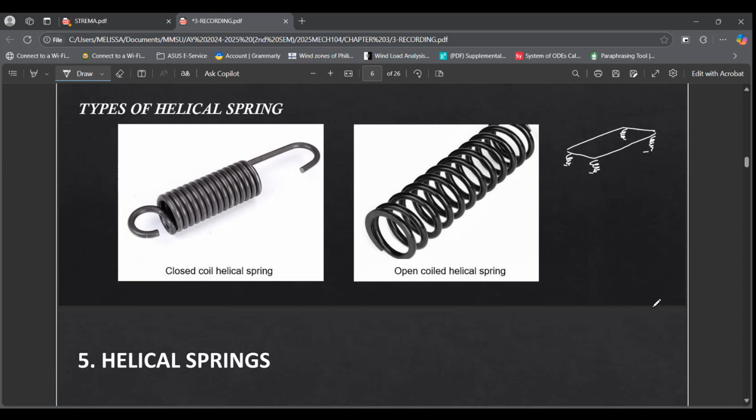What other type of spring undergoes compression? Buildings or structures. We have an example here - a simple steel structure with a machine on top. What does it carry? A load. So the helical springs here are designed to be compressed.

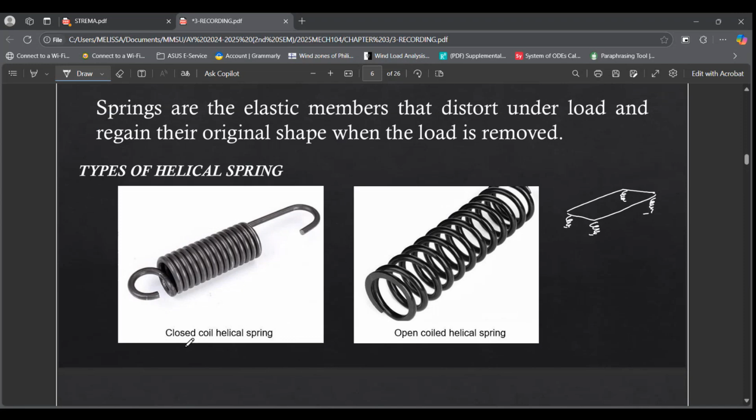And our open coil helical spring is good for tension. If the closed coil carries compression, the open coil carries tension. An example of springs that carry tensile loads are the springs used in doors. Our doors have automatic open and close mechanisms. When we open it, it's intended to stretch, intended to open the door. So when the door opens, it will elongate - it undergoes tension.

So those are some examples of helical springs that undergo compression and tension.

So what are the functions of a spring? Why do we need to study this in Mechanics 104? Aside from the functions we've already encountered, like brakes and mattresses, there is a larger use of helical springs in civil engineering. So what are some of the functions of a spring?

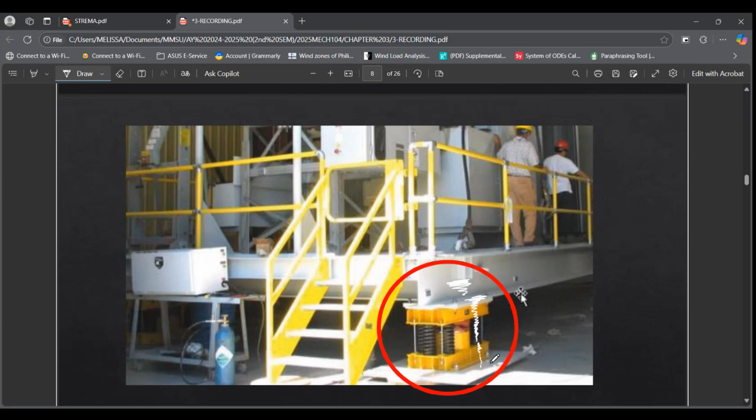Next function of spring is the energy storage and release. Kagaya ng sinabi ko kanina, yung ating door, tapos merong siyang spring, this is the door lift. Connected, merong nakakonek dito na spring to the other wall. So pag inopen natin yan, it will release energy, yung naka-store na energy. So that is one example or function of the spring.

So tension, it will now release tension para mas mapadali yung pag-open natin dun sa door. It will now release yung naka-store na energy.

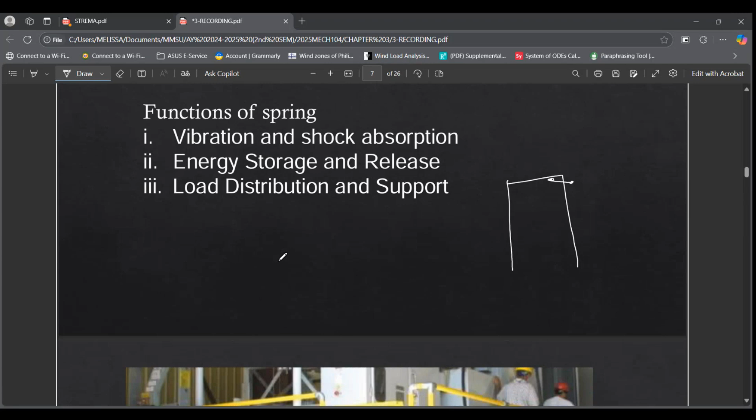Another function of the spring is the load distribution and support. Here we have an example, this is a bridge. Meron tayong dito yung girder and then another girder. So it is being connected by a device tinatawag na seismic isolation device, also made up of spring yan. Para pag nagkaroon ng any shaking dito sa baba, it will transfer less energy papunta dito.

Or ganito rin naman dito, pag nagkaroon ng vibration sa taas, it will cause less shaking or vibration dito sa baba kasi ina-absorb na siya mismo ng ating spring.

Ano pa yung mga structures? Ayan, structures, a floor, it is being isolated. Yung ating beam dito, it is being isolated from the floor. So pag nagkaroon ng any shaking dito sa baba, hindi direct yung effect dito sa ating floor kasi ina-absorb siya ng ating spring. So later on, you will be encountering these types of devices.

Pag nagtrabaho na kayo or pag nag-proceed kayo sa higher year, okay, the use of the helical spring, the advantage of using helical springs.

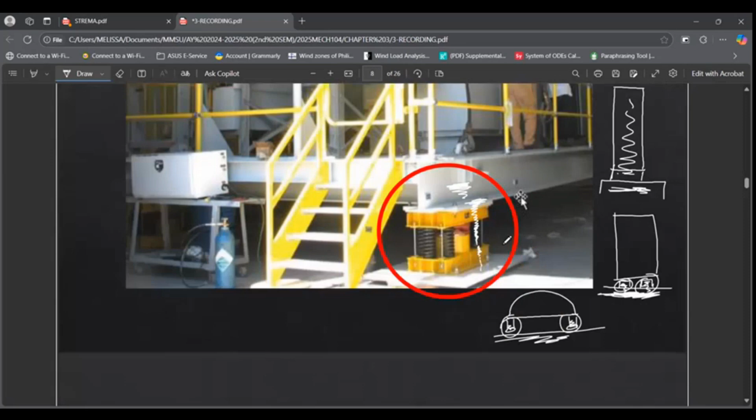Let's proceed now to the definition of terms. The stiffness of a spring is defined as the load per unit deflection. Stiffness, I think na-introduce na sa inyo rin to yung word na stiffness. Pag sinabi natin stiffness, this is the measure of how much yung spring resist stretching or compression, when being subjected by a force.

I think gumamit tayo ng letter or symbol K for stiffness. We use the symbol K for stiffness, on which we defined as stiffness is equal to the load per unit deflection, or P divided by the deflection. So stiffness K is equal to P, the load, divided by the deflection. Yung stiffness natin, naka-Newton per millimeter.

And then, the solid length of the spring means the distance between the coils when the coils are touching each other. Ibig sabihin, we are just multiplying the number of coils. Pag sinabi natin coils is 1, one rotation of coil. So this is N, yung N is the number of coils na na-produce. Isang coil is isang rotation. Multiply lang natin yung diameter.

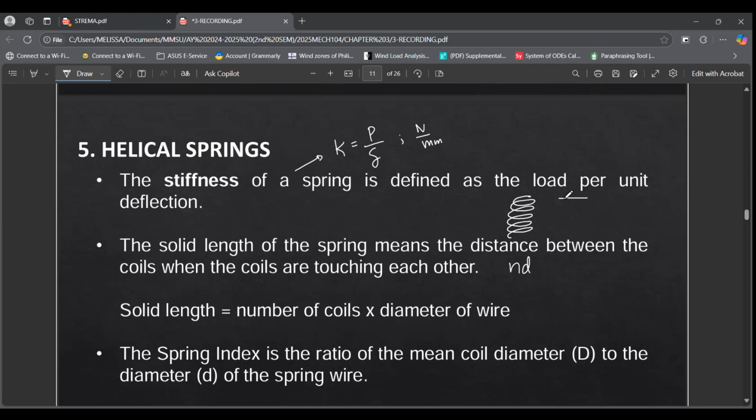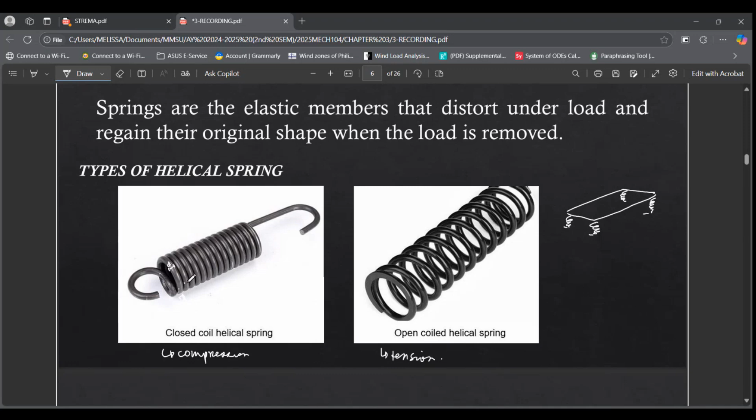So the solid length of the spring is equal to N multiplied by D. Bilangin mo lang kung ilang ikot yan, yun yung N. And then we have now the diameter. So pag well compressed siya, dito tayo sa drawing na ito. Pag na-compress siya, ayan, bilangin mo lang kung ilang ikot yan, tapos multiply mo ng kanyang diameter. This is the diameter. N multiplied by D, that is the solid length of the spring.

So the spring index is the ratio of the mean coil diameter to diameter of the spring. Yung spring index natin, M yung ginagamit natin, spring index, mean coil diameter D divided by the diameter of the spring.

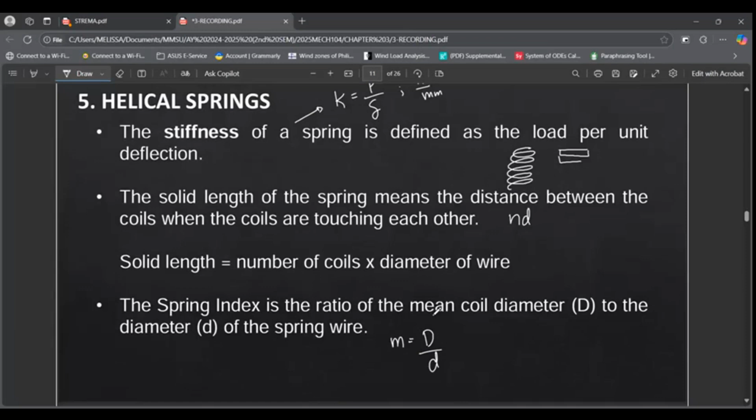Dito muna tayo sa mga symbol bago natin i-identify yung mga D at yung small letter d. We have here a helical spring. Yung D kanina na ginamit natin is this one, the mean diameter of the spring. Ibig sabihin ito, diba, it is circular in shape, so this is the D, the diameter of the helical spring. Tapos yung diameter ng coil is ito, kung ano yung diameter na ginamit sa coil. So yung spring index natin is the ratio of the capital D, the mean diameter of the helical spring, divided by the diameter of the coil.

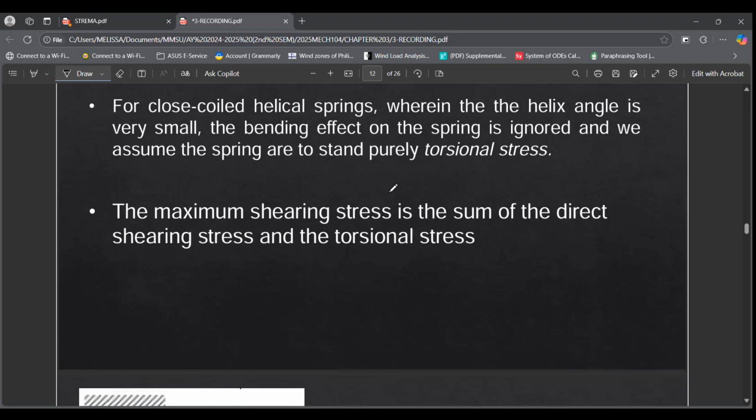And then yung deflection na mangyayari is symbolized the same dun sa deflection na symbol na ginagamit natin on chapter 2.

For close-coiled helical springs wherein the helix angle is very small, the bending effect on the spring is ignored and we assume the spring is to stand purely torsional stress. So for helical springs that are close coiled, we neglect the effect of bending. In reality, there is bending, but it's minimal because the coils are so tightly spaced, so we assume it only experiences purely torsion.

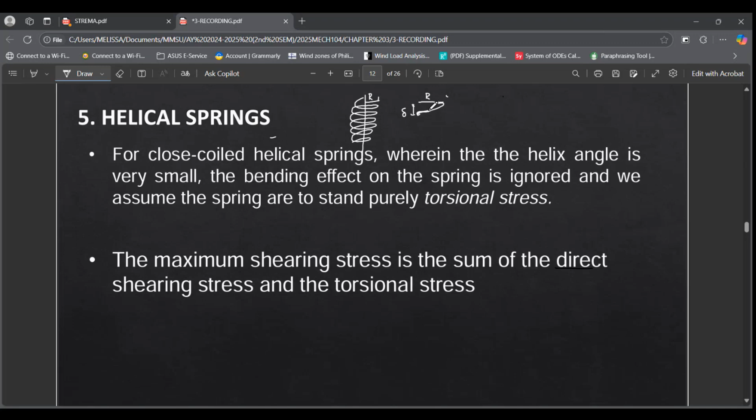So what is the helix angle? This is it, theta. If we take that, we have tangent theta equal to opposite over adjacent, which is the deformation over R. Since the helix angle is very small, we can consider theta equal to the deformation divided by the radius. That's what we call the helix angle.

If the helix angle is too small, we can assume the spring is to stand purely torsional stress. With torsional stress, as we discussed in the previous chapter, it experiences shearing stress or shearing deformation — our helical spring will now experience shearing. Therefore, the maximum shearing stress is the sum of the direct shearing stress and the torsional shearing stress. So we now have two types of stress here.

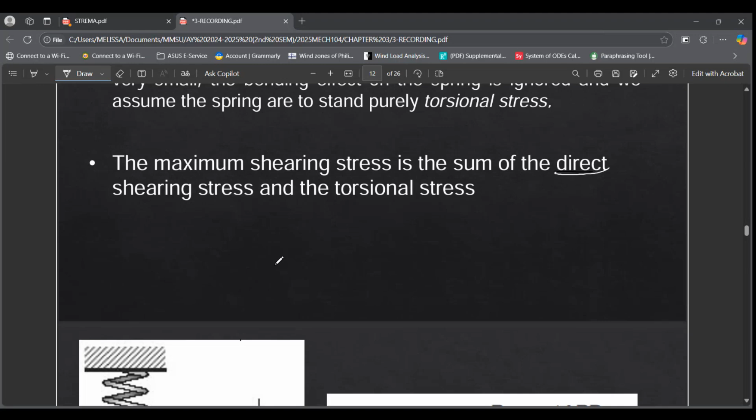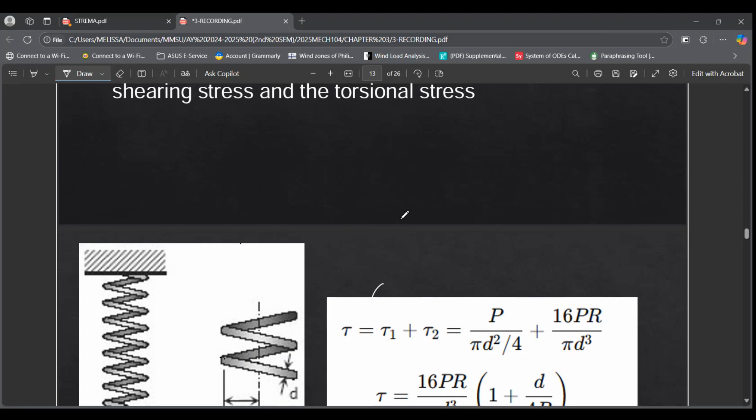In other words, this is expressed with tau 1 as the direct shearing stress and tau 2 as the torsional shearing stress. So how did we get that? Let's take a look at this illustration. Let's take this sample and derive the formula, so that even if you forget the formula, you'll know what to do.

We have here a force P. This is also the diameter, a constant diameter for the coil — small letter d — and this is the radius, r. Let's put a force P here and another force P here, like an equilibrium, so nothing really happens in this part; we just placed it so we can derive the formula.

So when we say maximum shearing stress is the summation of the direct shearing stress, call it tau 1, plus the torsional shearing stress — direct shearing stress from chapter 1, we have a force divided by the area parallel to it. Therefore, tau 1 is equal to P divided by the area, where the area is pi d squared all over 4.

For the torsional shearing stress, call it tau 2, based on the formula from the first topic of this chapter: torsional shearing stress equals T R all over J. Now, what is the torque? Torque is equal to P multiplied by R — there's torque in this part.

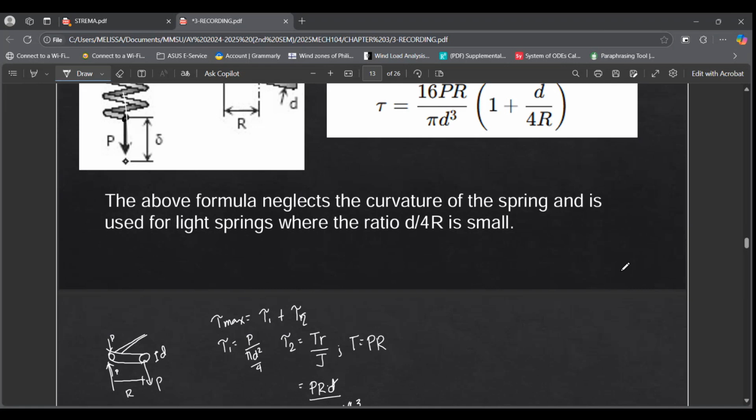So for further simplification, naging ganito ito, na-simplify lang. Okay na to, pwede mo nang gamitin direct. So kung ayaw mo mag-memorize, okay lang naman, mas advantage pa nga pag hindi ka nagme-memorize ng formula.

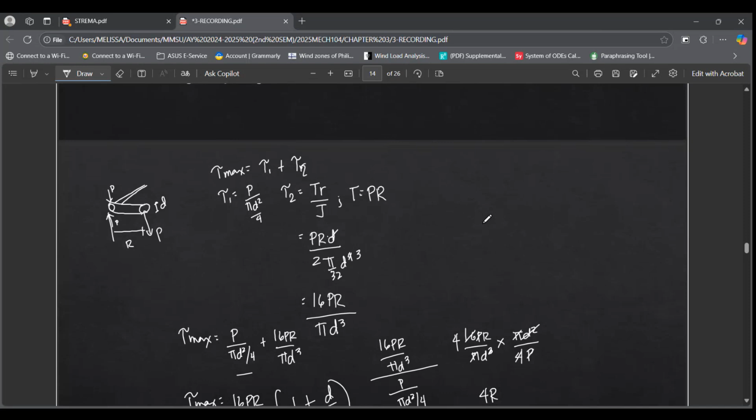But then again, it's up to you if you want to memorize this one or dun ka na lang sa concept, mas madali pang tandaan to. Anyway, it's up to you.

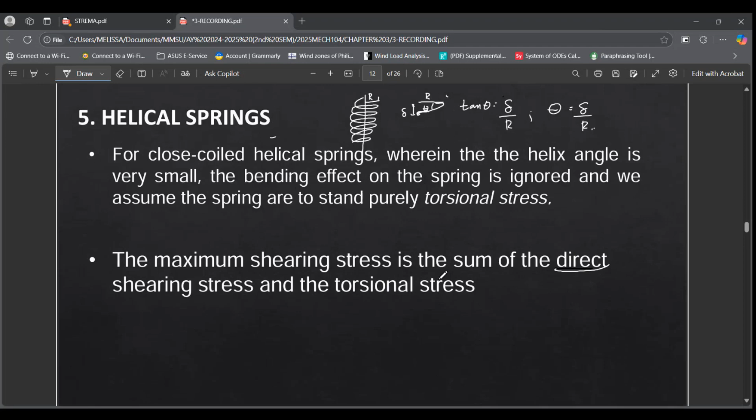So this formula is only used for, sabi nga natin kanina, nina-neglect natin yung bending. Therefore, if we use this formula, we are only assuming na this is a light spring, where the ratio D all over 4R is very small. So again, if we use this formula, we will neglect the curvature, and yung D all over 4R are very small. So this is only for light spring.

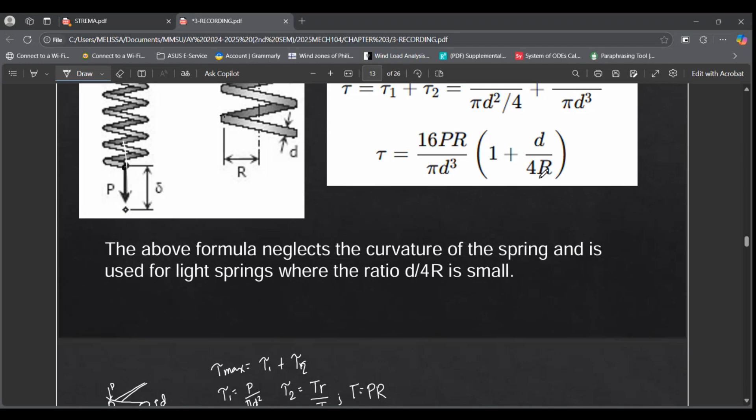Light spring. Paano naman pag meron tayong heavy spring? So if we have heavy spring and considering the curvature of the spring, we now have a formula na gagamitan natin ng tinatawag na Wahl factor. So this is the Wahl factor, 4m-1 divided by 4m-4. Ito, parang yung kanina, yung formula natin 16PR pi d cube, naging constant lang kasi siya dito. Kaya magkamukha, 16PR pi d cube, kaso nga lang iba na yung nasa loob ng parenthesis.

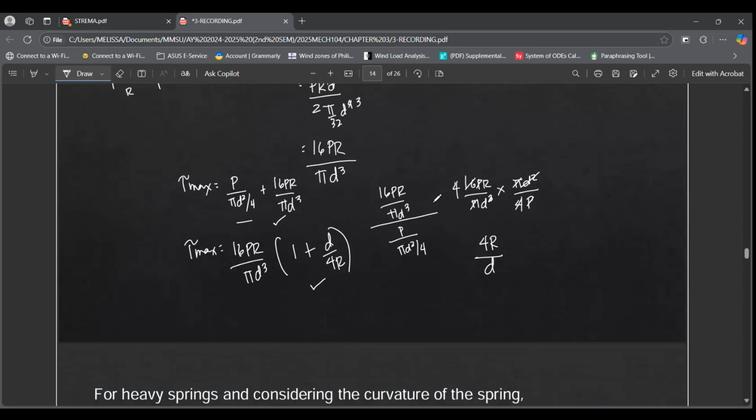Gumamit tayo ng Wahl factor, the 4m minus 1 divided by 4m minus 4 and then plus 0.615 all over m, on which m is the spring index. Based on the discussion a while ago, pag sinabi natin spring index, this is the ratio of the helix diameter divided by the diameter of the coil. So this is yung Wahl formula or Wahl factor na yan, this is used to account additional stresses due to the curvature of the spring. So more accurate yung computation natin dito kasi we already consider the curvature of the spring.

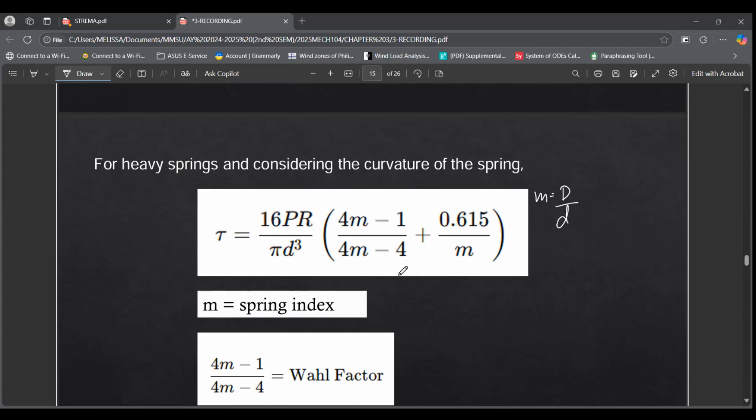So ito lang naman yung mga tatandaan nating formula. We have for the heavy spring, we have for the light spring, and then the spring index D all over D, and then we also have here the elongation of the bar or ano yung magiging deformation ng helical spring. So deformation of the helical spring, sige try nating i-derive kung saan galing yung formula na to.

So based on the computation a while ago, we need to consider here yung ating helix angle. Yung helix angle natin kanina is theta, and then this is the deformation R. Therefore, the deformation is equal to S, or the helix angle is equal to deformation divided by R. So ano yung formula natin ng angle of twist? We have here TL all over JG.

On which yung torque natin is considered as P multiplied by R, and then we need to consider the length of the coil. So the length of the coil, how do we determine the length of the coil? Yung ating spring is in form of helix or cylindrical in shape, so if we want to determine the whole length of the helical spring, iba pa yung solid length kanina, guys, ha?

Iba yung solid length. Pag sinabi nating solid length, yung pag dikit-dikit yung coil, this is the solid length. Iba naman yung tinutukoy ko dito na length of the coil. So pag sinabi nating length of the coil, yung length ng lahat ng coil na to, kung ano yung haba niya.

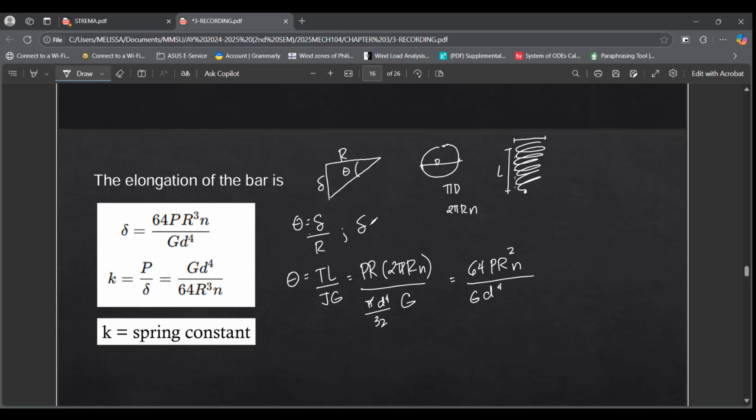And what we want to get is the deformation. Therefore, deformation is equal to the angle multiplied by r. So the deformation equals 64 P R squared n divided by g d raised to 4, multiplied by r, giving 64 P r cubed n divided by g d raised to 4. So this is now our formula for the elongation of the bar: 64 P r cubed n divided by g d raised to 4. That's where our formula for elongation was derived.

And then, the stiffness, as mentioned earlier, is P or the force divided by the elongation. That's easy. We have P divided by the elongation, which is 64 P R cubed N all over G D raised to 4. The P's cancel, so arranging it, we get G D raised to 4 all over 64 R cubed N. So even if you don't memorize it, just use 64 P R cubed N over G D raised to 4.

Then, you know that the stiffness is equal to P all over the deflection (delta). The spring constant and stiffness are the same thing.

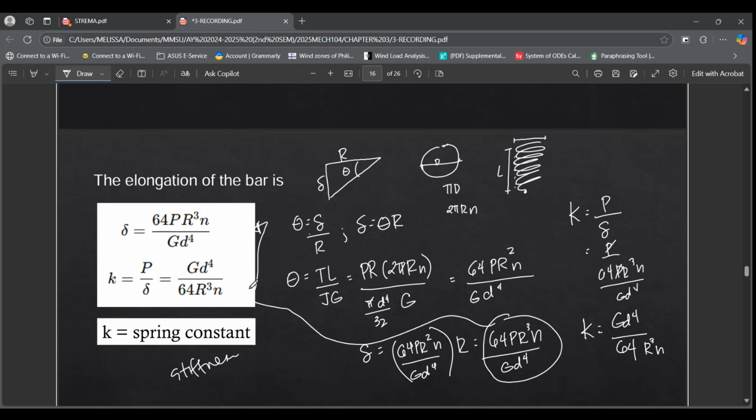And then, what are the different types of springs that we have? You're already familiar with this because of the connections in electrical subjects, like the wiring connections. You probably already have an idea of series connection and parallel connection.

So for springs in series: for two or more springs laid in series, if we want to get the equivalent spring constant or stiffness of the whole spring arrangement connected in series, we use 1 over K equals 1 over K1 plus 1 over K2 plus 1 over Kn. That becomes the equivalent spring constant of that combined connection.

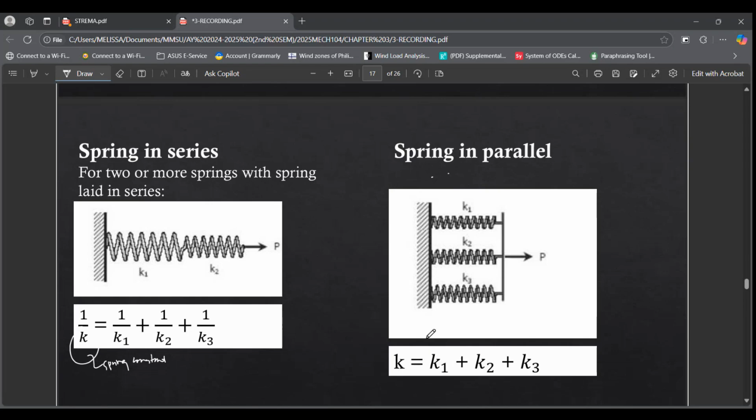And then, for springs in parallel, if we want to get the equivalent spring constant or stiffness of these three springs here, we just add their stiffness or spring constants. That is spring in parallel.

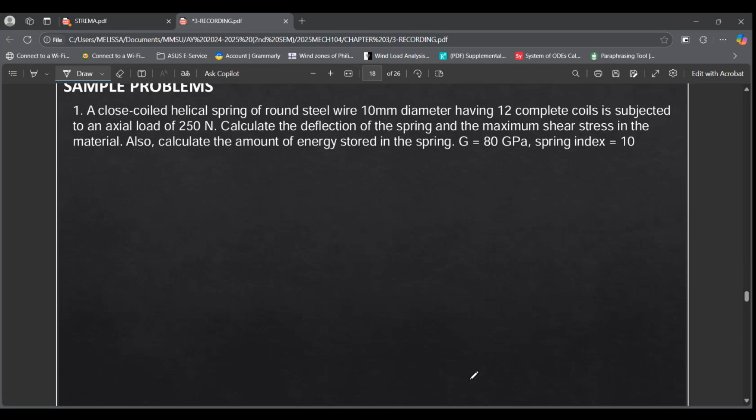Okay, let's proceed to the example. A close-coiled helical spring of round steel wire, 10 mm diameter, having 12 complete coils, is subjected to an axial load of 250 Newton. Calculate the deflection of the spring and the maximum shear stress in the material. Also calculate the amount of energy stored in the spring. The shear modulus is 80 gigapascal and the spring index is equal to 10.

So we have a 10 mm diameter coil, this is the small letter d, 10 mm. And it has 12 complete coils, so this is the number of turns, N equals 12. It carries an axial load, P equals 250 Newton. We are asked to compute the deflection of the spring, the maximum shear stress in the material, and also the energy stored in the spring.

Okay, so it looks like this: there are 12 turns, and it carries force P. For this problem, the shear modulus is also given, 80 gigapascal, and the spring index m is equal to 10. So how do we determine the deformation?

So, the deformation of the bar is equal to, from the derived formula, 64 PR cube N divided by G D raised to 4. So we have 64. What is our P? 250 Newton. Ano ba yung R?

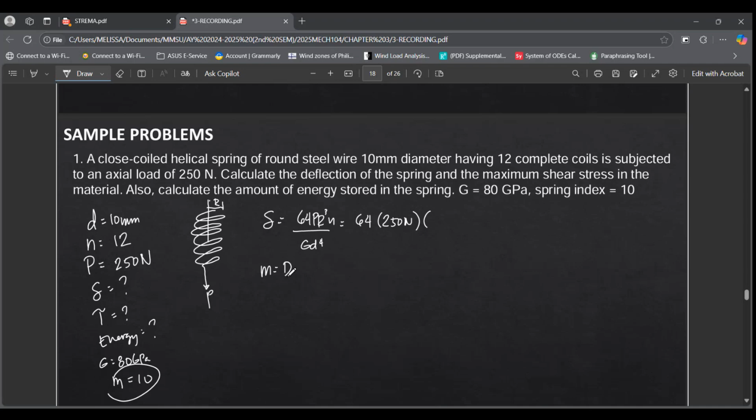R is the radius of the helix or the helical spring. Ito po yung R. Paano natin kukunin yan? Hindi given, pero ang given is yung spring index. We know that the spring index is equal to the ratio of the diameter of the helical spring divided by the diameter of the coil.

Okay, so we have here 10. Ano yung D natin, small letter D? We have 10, therefore the diameter of this helical spring, ang magiging diameter niya ngayon is 100 millimeter. Therefore the radius will be equal to 100 divided by 2, millimeter, raised to 3. Ilang number of turns? We have 12.

Divided by G is 80 gigapascal or 80 times 10 raised to 3 Newton per square millimeter. And then D raised to 4, we have 10 millimeter raised to 4. Therefore the deformation is equal to, okay, ano yung mga naiwang unit? Cancel out Newton, this is millimeter cube, millimeter 4. Magka-cancel yan, magiging squared, cube, tapos squared, so natira is millimeter.

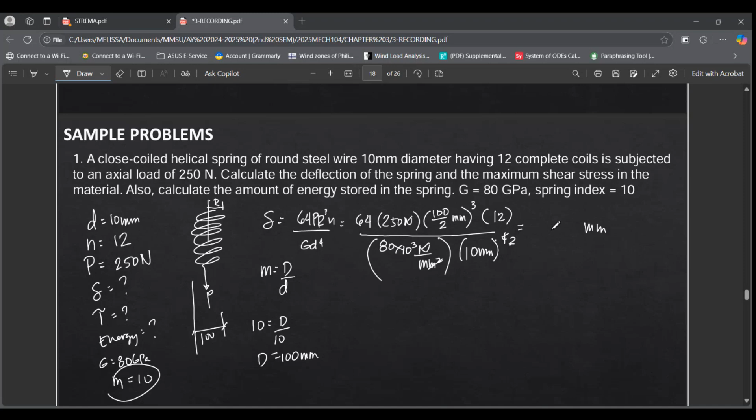Okay, so the answer is 30 millimeters. 30 millimeters yung deflection of the spring.

Next, the maximum shearing stress we have here. Ayoko mag-memorize, so we have the direct shearing stress plus the torsional shearing stress, which is equal to TR all over J. Pero again, pwede nyo gamitin yung na-derive na formula. So we have here P. Ano yung P natin? We have 250 all over the area, pi d squared all over 4.

Okay, so we have PR. P is 250. R natin is 100 divided by 2. Tapos yung small, guys, yung T is yung P multiplied by R, yung derivation natin kanina. And yung R natin, small letter R, is 10 divided by 2. J natin is pi all over 32, D raised to 4. So we have D raised to 4.

Therefore the answer is equal to... so the answer is equal to 66.845. Ano yung mga natirang unit natin? Naka-Newton ito, tapos naka-millimeter squared.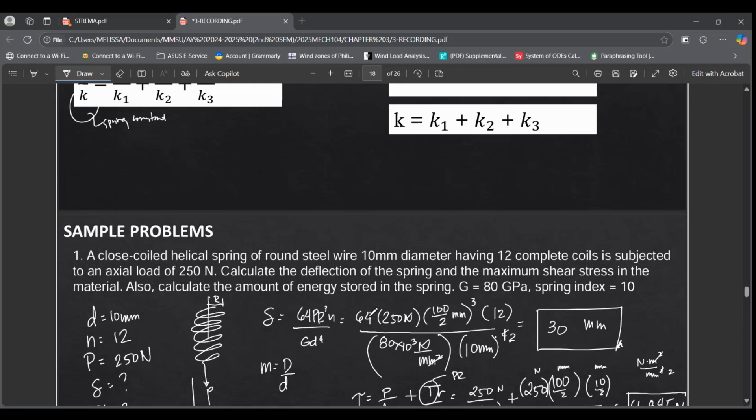Same lang, ano yung formula? 16 PR pi d cube 1 plus d over 4r. Okay, so same lang, sige try natin. 16, ano yung P is 250 Newton. Radius is 50, di ba? 100 divided by 2 millimeter.

We have pi, ano yung D? 10 raised to 3. 1 plus 10 all over 4 multiplied by 50, di ba? 50, 100 divided by 2. So ang magiging sagot dapat 66.845 din.

Mas gamay ko lang kasing gamitin yon kasi hindi ako masyado talaga sa memorization. Mahina ako sa memorization ng formula. So doon na lang tayo sa may concept.

Okay, 1 plus 10 all over 4 times 50. So the answer, yes, the answer is still 66.845. Okay, again, it's up to you if you want to memorize this formula or just the concept. Walang pong problema, as long as we derive the same answer, 66.845 megapascal.

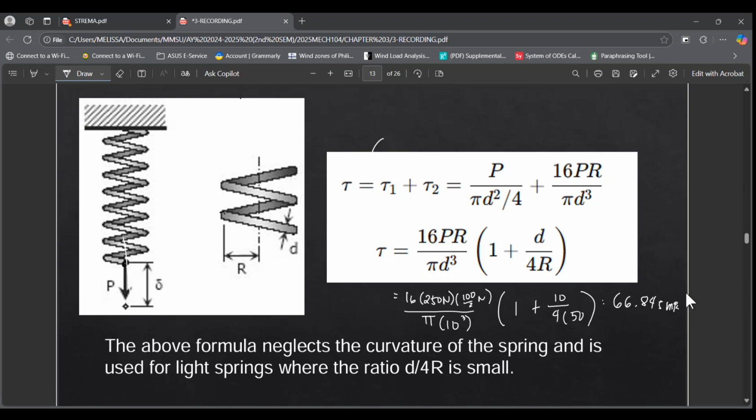And then the last one, the energy stored in the spring. Hindi ko na i-introduce sa inyo dun sa may compute dun sa may formulas, but here if we are talking about the energy stored in the spring, it is just equal to, it's symbolized as U, capital U. U is equal to 1/2 of the force multiplied by the deflection, 1/2 P multiplied by the deflection.

Okay, so yung U natin, sige tignan natin yung magiging unit. So 1/2, ano yung P? Again, this is energy, this is the energy being stored by the spring. So 1/2, yung P natin is 250 Newton, the deflection is 30 millimeter. Therefore the answer is equal to 250 times 30 divided by 2. So we have 3,750, naka-Newton dot millimeter tayo.

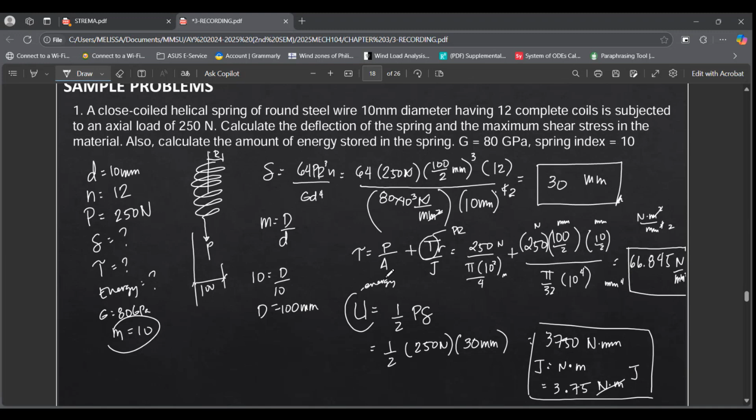Or in other words, yung U natin is naka-Joule. So if you want to convert it into Joule, kasi ang Joule is equal to Newton dot meter, so pag ginawa mong Newton dot meter, yan magiging 3.75, di ba? 3.75 Newton dot meter or Joule. Okay, so yan yung sagot for the energy being stored. Energy being stored is 1/2 P multiplied by the deflection, expressed in Joule. Okay, so that is for example number 1.